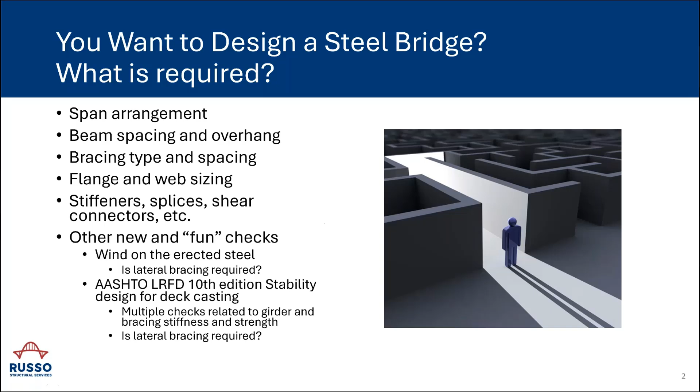So we're going to talk about some of the AASHTO LRFD 10th edition stability checks that are new and needed for deck casting. So what is bridge design?

Well, bridge design is kind of a unique combination of shalls and musts. Those are the things we find in the specification - in the case of a highway bridge, that's AASHTO. Some of the things you should do, maybe you'll find in the commentary of the specification. How about some things that would be good if you did them? A good source of standard industry guidance on best practices would be some of the National Steel Bridge Alliance, or NSBA's, collaboration documents. How about 'I wish you would' - some other guidance, maybe your local fabricators or erectors have preferences. And then there's 'don't you dare' - the things we have to avoid at all costs.

I like to tell designers there are many good designs. We ought not argue about whose design is better - maybe the thing we ought to do is avoid the bad ones. So that's what a bit of this presentation is about.

I want to begin at the end, and that is to sort of tell you where we're headed or why we're making this presentation. It's to highlight for you some of what can be found in AISC's NSBA standard plans for steel bridges, which you'll find at the homepage or landing page of NSBA's website, highlighted for you at the bottom right of the slide there.

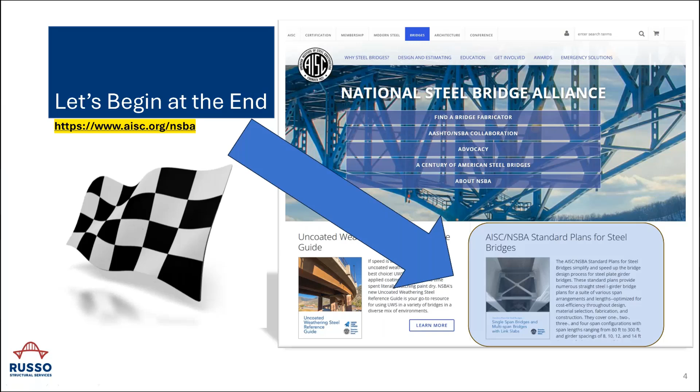The standard plans for steel bridges are a series of PDFs of almost 300 pre-engineered bridges that you can use to help with your design. There's nearly 300 — exactly 296 if you want to count them. The spans range from 80 to 300 feet, with beam spacings of 8, 10, 12, and 14 feet. Inside the 4 PDFs — one each for single span, 2-span, 3-span, and 4-span continuous bridges — you'll find the girders, stiffeners, shear studs, splices, tables of reactions and camber, pre-engineered diaphragms and cross frames, deck pouring sequences, and more.

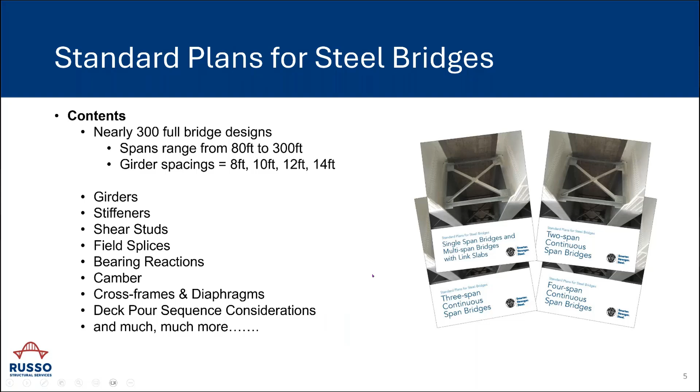So let's begin by talking about the fundamentals of bridge layout and planning in general, as it sets the stage for the various choices made in the development of the standards.

If we think about continuous spans, we tend to favor what is known as a balanced span. For multi-span bridges, continuous spans are generally preferred because they're more structurally efficient. Once you make a span structurally continuous, the ratio of the spans has a lot to do with the forces that develop in the individual spans. A balanced span arrangement, if we can achieve it, is preferred — one in which the end span is somewhere in the range of 75 to 82% of the length of the center span.

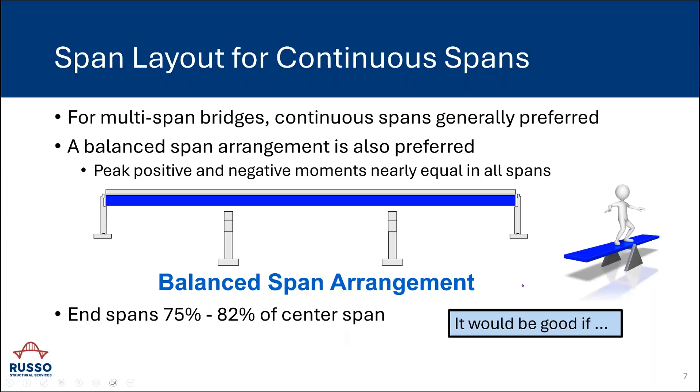It would be good, right, if there are no constraints on what your span lengths could be, to have a balanced span arrangement. What is this?

And the negative bending moments over all 3 piers are also virtually equal. So what does that mean for us? It means instead of a 4-span bridge with many different field segments that each have to be individually designed, I have a 4-span bridge where, in reality, I just have 2 things to design: one positive moment section repeated in 4 different spans, and one negative moment region repeated over 3 of the piers. So we've optimized, to the extent we can, the longitudinal layout of the bridge.

And now how about the transverse cross section? We have to support a certain number of lanes and shoulders and whatever the roadway engineers dictate the highway cross section to be, but we still have latitude and flexibility in choosing the beam spacing. Picking the beam spacing is a balance between establishing an overhang and establishing a standard beam spacing.

In the literature, and in some NSBA guidance and guidance from the Federal Highway Administration, you'll see it cited that an overhang that's about 28 to 35% of the beam spacing results in the forces in the exterior girders — which also carry the barrier rail and have different live load distribution characteristics — being about the same as the forces in the interior girders.

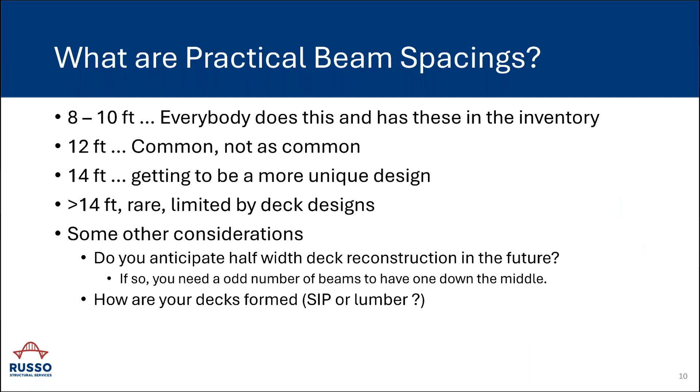Others are still using strippable, removable lumber forms. Each one of those has a practical limit to the maximum beam spacing.

How deep should a girder be? AASHTO provides some suggestions, not a hard requirement, but those suggestions echo traditional historic practice, and that is L over 30 as the minimum suggested depth of the plate girder alone for a simple span, and we can go a little shallower, 80% of L over 30, for continuous spans, because we get the benefit of structural continuity.

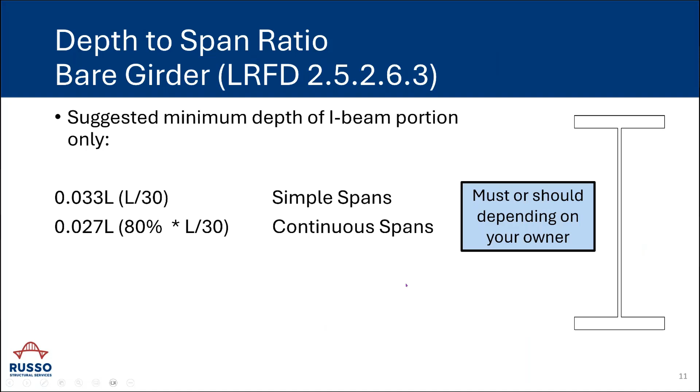And then how about the girder and the deck combined? Starting with simple spans, you generally don't want to be shallower than L over 25. You also don't need to go much deeper than that to get an economical section. For continuous spans, again, we can be a little shallower, 80% of L over 25, as shown in the specifications.

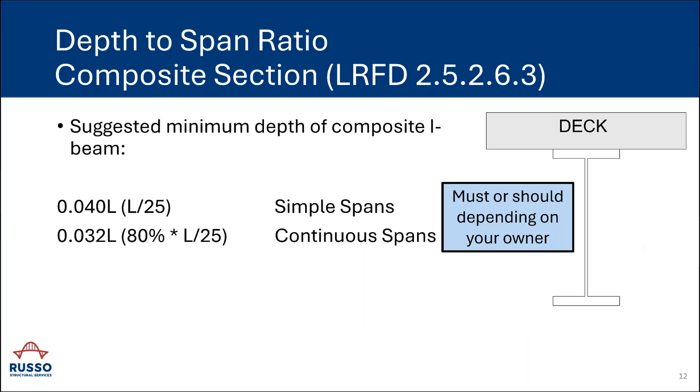The width of the flange should never be less than 1/85th of the length of the field section. Why? It becomes incredibly hard to pick that girder up with a crane or put it on a truck and ship it if you have very narrow flanges relative to the length of the section. So that would be one of those things that it would be good to do, but it's not an absolute requirement in the specifications.

For straight bridges, there are really no as-designed forces in those cross frames. We design our girders with some presumptive load distribution factor that assigns load to the girder, but never really considers the overall behavior of the system.

So what governs the size of this bracing? If there are no computed loads, the answer is you're soon going to find out. But what role does that bracing have?

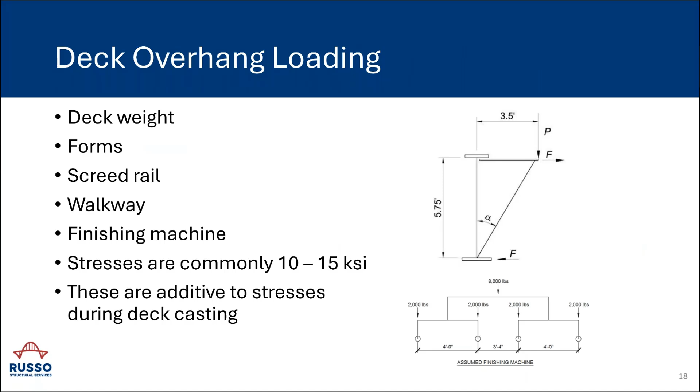And they are then additive to the stresses from the girder self-weight and the concrete that come from the deck casting process. All of this was considered for you in the development of the standards.

So where are we? We have a good design in the sense that we've laid out some reasonable spans, we picked some reasonable beam spacings, we have a girder that maybe is about the right depth, and all of this can be done with a line girder, and we can make sure that all of this satisfies AASHTO.

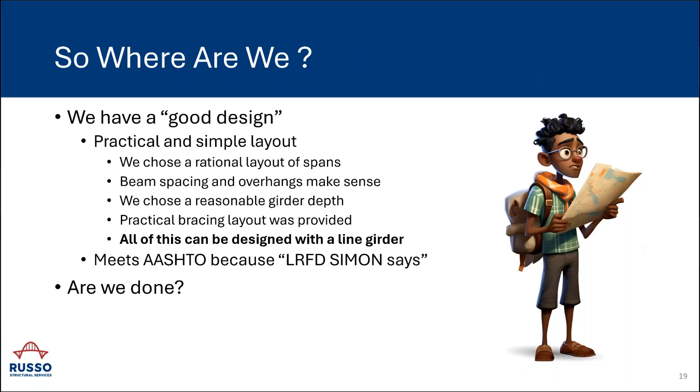Using for instance NSBA's LRFD Simon program, which can design a line girder for you in just a few minutes. But are we done? Is that all the specification asks of us? That we pick a couple of variables, type something into the program, and magically we're finished? I'm here to tell you, maybe unfortunately or fortunately, you're here today to hear it: no, we're not done yet. There are some other things to think about, like...

Wind loads and stability of the bridge during construction, and these new stability bracing requirements that I alluded to earlier, that have come into the specifications with the 10th edition.

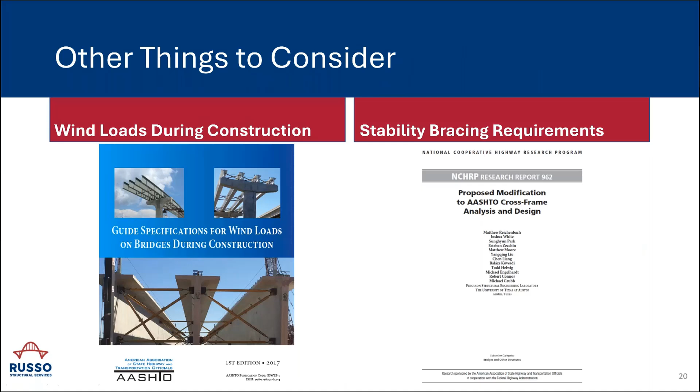The wind loads during construction come to us from a guide specification that AASHTO published in 2017. But if you dig into that specification, what you find is that these are really just strength design loads. What happens to the bridge in a hurricane? It doesn't really say much about how the bridge behaves under ambient winds, and whether the bridge is fundamentally too flexible to even be built. Can we put people out there and walk around on the steel if the bridge is moving around 2 feet in a light breeze? The specifications don't really address that.

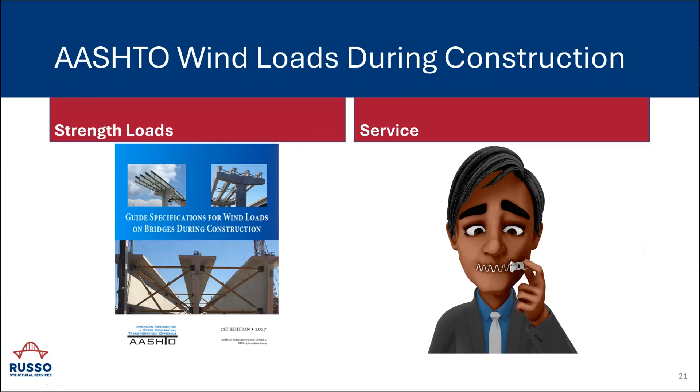What do the specifications do? Again, they mimic a strength design approach that we see for completed bridges in the LRFD specifications, and instead provide a series of coefficients and loads that are applied to girders, let's call it in the open framing condition. This process of wind load on the open framing was considered in the development of the standards, and there is some detailed notes and design criteria that were used for the design of those bridges.

So what is an engineer supposed to do about the service load behavior? Well, the answer is it really depends on where you work. The state that I live in, Pennsylvania, my home state Department of Transportation PennDOT has had some criteria, that to the best of my recollection has probably been around 20 years, that talks about loads that are to be looked at during construction of the steel bridge, making sure that the steel is not fundamentally too flexible in the lateral direction. And if it is, how do you stiffen it up?

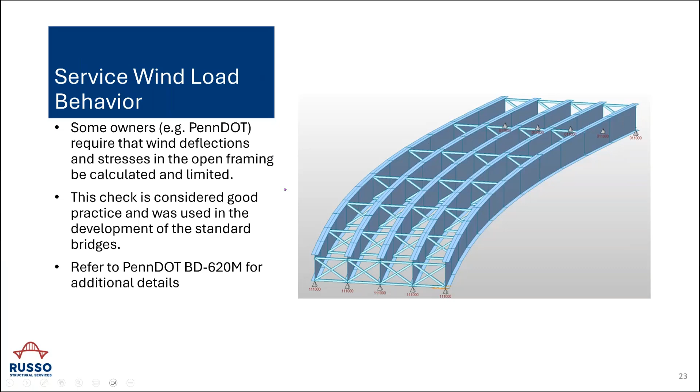Either by making the girder stiffer or by adding lateral bracing. PennDOT has a standard called Bridge Design Standard 620M that you might look at if you're interested in some of that criteria. What do these wind loads do, whether they're service loads or strength level loads?

Well, in the case of a single span, they bend a whole bunch of girders sideways. And we know what the moment is. The moment is easy, right? It's WL squared over 8.

But even predicting the deflection gets a little bit challenging because we tend to not have a uniform moment of inertia down the length of our span, even in the lateral direction. We have smaller plates near the end of a span and bigger plates near the center of the span. So even predicting deflection is not so easy for a simple span.

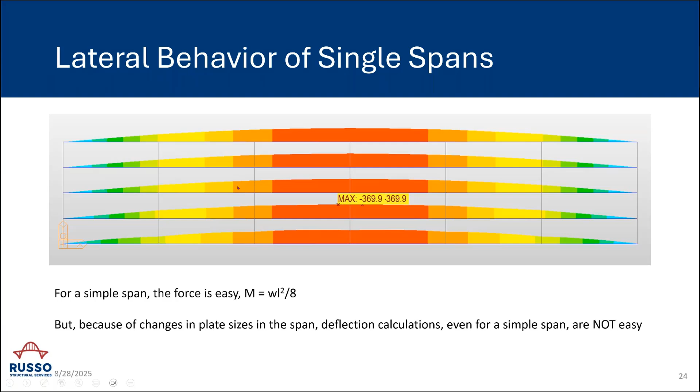For a continuous span, this becomes a mess. There's not really any rational way to figure out what the moments or the deflections are, because it depends on so many factors: the stiffness of the beams, the relative span length, the loads that are applied.

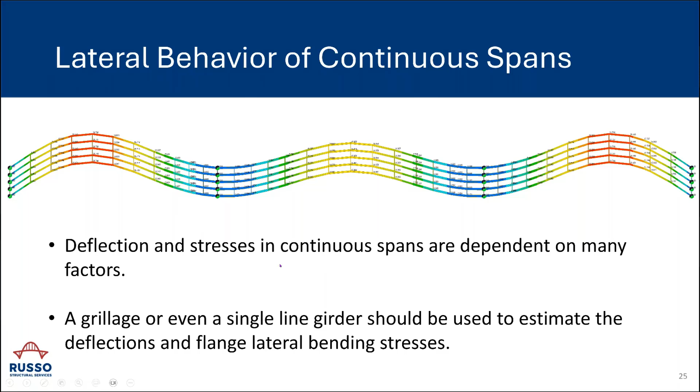But the good news is something like a grillage that you see here on the screen, or even just a line girder—make one line girder, get the total result, and sort of divide it evenly by the number of girders in the cross section—can be used to estimate those deflections and stresses.

And it's just a reminder, why do we care about these wind stresses? Well, during construction of the bridge, these wind stresses also become additive to, say, the self-weight of the structure, again as some sort of a strength or a service limit state check of the capacity of our flanges. It's not a hard thing to do, to go ahead and build a simple model and put some load on it.

PennDOT has a criteria, which we adopted in developing the standards, that says the maximum permissible deflection would be L over 150. So we're close, right? We're just a little bit over. Could we have closed our eyes to a half an inch? Probably. But the point I bring this up is to emphasize how you get out of this problem.

One way out of the problem is to reproportion your flange. Take whatever the flange was, so wide and so thick, and make it thinner and wider. When you do that, you increase the lateral moment of inertia, which is a cubic function of the flange width, and maybe that solves the problem.

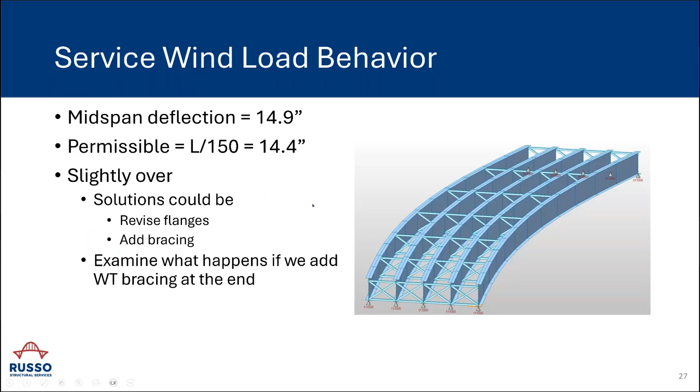So this is the same exact bridge with lateral bracing added at the end of the span. If you stare at the image, at the bay closest to us and furthest away, I have top flange lateral bracing shown in that model. The midspan deflections are now just a little over an inch, where they were previously about 15 inches.

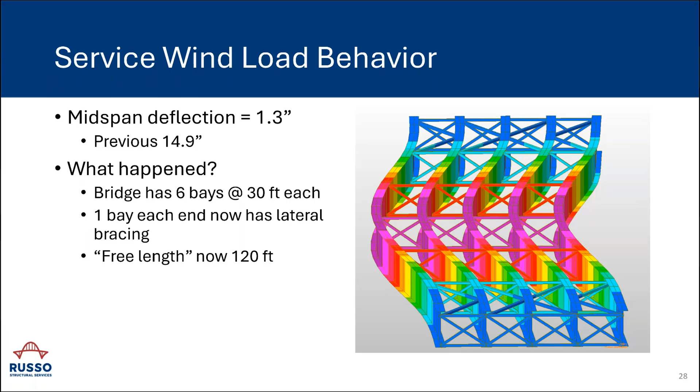Well, obviously we stiffened the end of the bridge. It went from kind of a pinned condition to almost a fixed condition, and the unbraced length went from 180 feet down to 120. So all of that tells you that lateral bracing very effectively reduces the deflections, but it's also going to pick up some load.

This is an acknowledgement of a really handy design aid. So this lateral bracing now has some loads in it. How do I design this eccentrically loaded lateral bracing? I point you to a publication with really handy design charts from AISC's Engineering Journal from 2010 that talks about the strength of eccentrically loaded WTs.

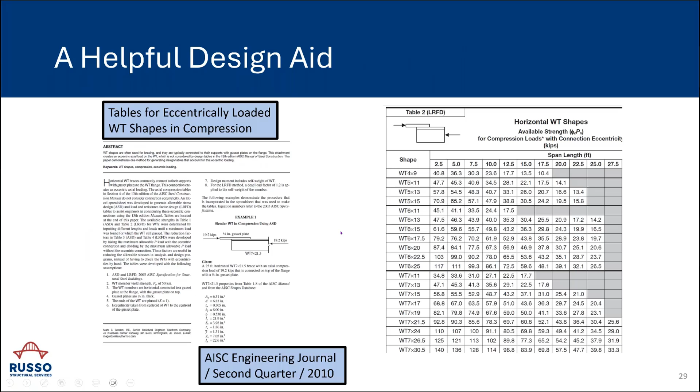All you do is go into one of these charts and say, what's my unbraced length and what WT am I thinking about using? That table on the right-hand side of the screen tells you how many kips the member can carry. So there's not much you have to do other than go look something up in a table.

Now, I had mentioned the stability design requirements, so let's spend a few minutes talking about that. What does bracing need to do? Every steel bridge we drive under, if we look up, we see something called a diaphragm or a cross frame. Why did someone put that in?

I said earlier that we put it in to reduce the unbraced length and control something called lateral torsional buckling. But it would also seem obvious that we can't just put anything in there. We couldn't go get some drinking straws and put them in, and because it looked like an X or a K, consider it to be a brace. Obviously that brace has to have some minimum strength and minimum stiffness in order to do its job.

I'm going to introduce you to the new provisions in the LRFD specification's 10th edition and briefly talk about what they do. The fundamental concept with a diaphragm or cross frame is to prevent twist of the girder. Now, I've already said lateral torsional buckling a couple of times, and if we slow it down further, that means the girder deflects laterally and twists in the process of buckling. If I can prevent either one of those things from happening, I can prevent lateral torsional buckling from being a governing design constraint.

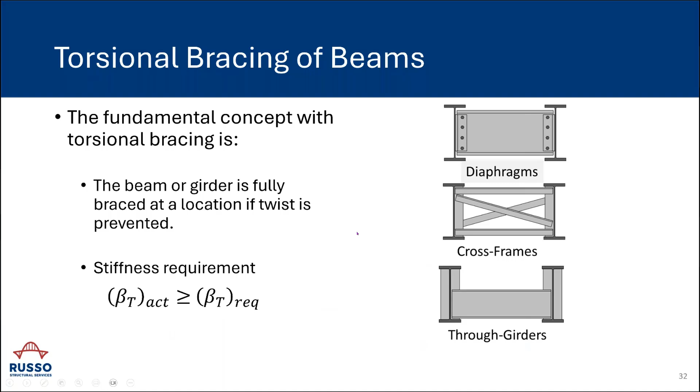The role of a diaphragm or cross frame is not to prevent lateral movement, because we could push these girders sideways and the diaphragm or cross frame doesn't stop that. The diaphragm or cross frame stops the girder from twisting about its longitudinal axis. It prevents torsion. That means we can write an equation that says the torsional stiffness provided to the girder, the thing that stops it from twisting, has to be greater than or equal to some required amount of stiffness that the cross frame needs to have.

You're going to find in a brand new article in the specification, 6.7.4.2.2, these two following governing equations. They look a little bit messy, but on the left-hand side is stiffness, on the right-hand side is strength. What does the stiffness equation require us to do? Let's take a look.

In the numerators, the span length and the factored deck casting moment. These are the moments that occur in the girder during the process of casting the deck. Given that we generally cast decks sequentially, particularly for longer span bridges, you've got to figure out the governing moments in the individual spans and use that as Mu. In the denominator, we have E, the lateral moment of inertia of the girder, Iy effective, and I have a little sketch at the bottom of the screen. It's the lateral stiffness of that girder, and it's just how many braces we have in the span. Then Cb is a moment gradient modifier.

So that's how stiff a cross frame needs to be. It has to be that stiff to stop the girder from twisting.

If we acknowledge that no girder is ever erected absolutely plumb, that there is some potential sweep or twist in the girder, then that becomes a seed deformation that also leads to a moment that will develop in the cross frame. So the equation on the right is everything in blue moved over. We're just going to bring the stiffness term over, and we're going to write that moment equals stiffness times displacement.

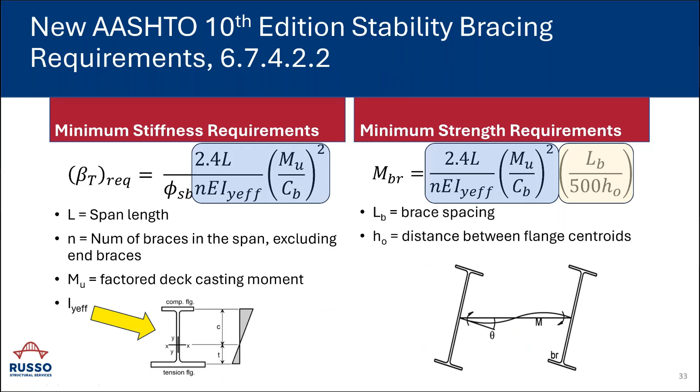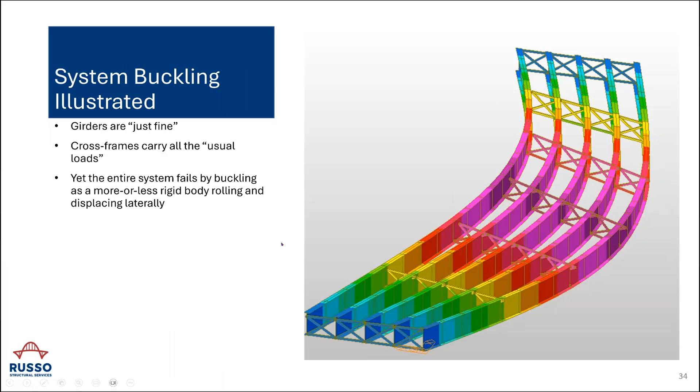Now let's talk about what is the stiffness that's provided. What stiffness is provided to the girder or inherent in the system? Well, we have this equation in the specifications. It says the actual stiffness, and remember, the actual stiffness has to be greater than something that's required, is 1 over 3 fractions in the denominator.

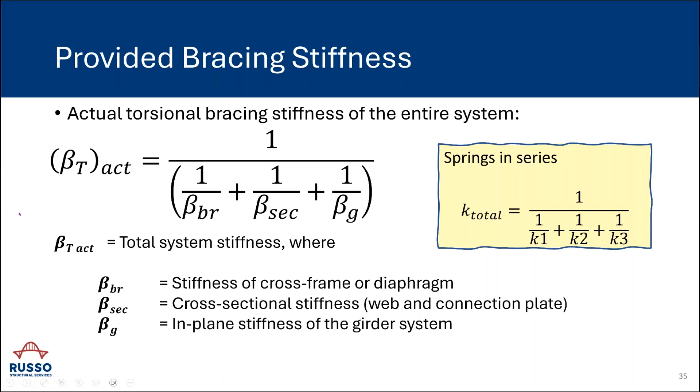There's the stiffness provided by the cross frame or brace, that's beta BR. There's something called cross-sectional stiffness, beta sectional, and something called the in-plane girder stiffness, beta G. And if we go back to high school physics class, we'll realize this is just a springs-in-series problem, right? Three springs strung together end to end. The total stiffness of that system is softer than even the softest spring because the springs are all leaning on each other for resistance. So let's start out with the cross frame.

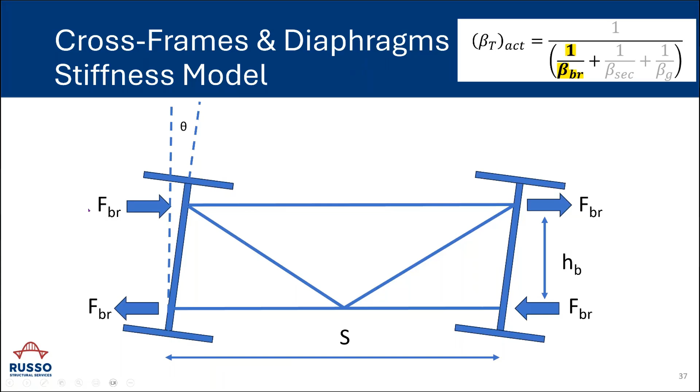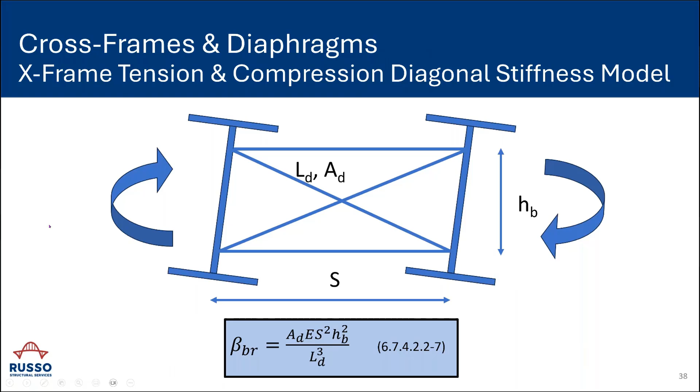The LRFD specifications are just going to give you the equation. So if you have an X frame, you simply plug in the areas of the diagonals and the chords and the height of the cross frame and the girder spacing into this equation, and it gives you the rotational stiffness of the frame itself. If you have a K frame, plug everything into this equation.

If you have a solid diaphragm, then we're kind of back to moment distribution, fixed end moment, side sway kind of problem. What is the flexural stiffness of a beam bent in double curvature? It's just 6EI over S. But these equations are given to you in the LRFD specification in these new stability articles.

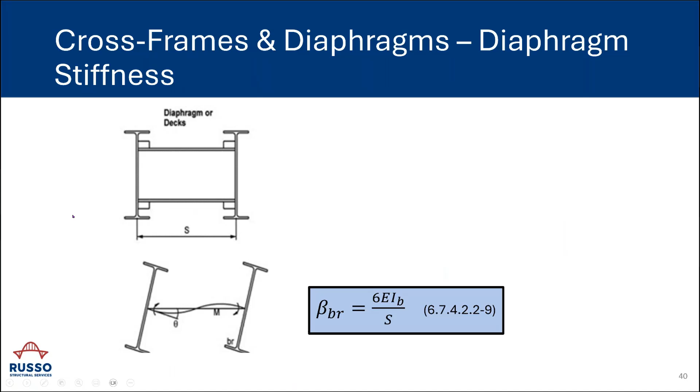There are equations given to compute it, but I want to remind you that for the most common thing we do, which is to design I girders, specifications already require that a brace be 75% of the depth of the web. So if we have to be 75%, and at 80% we don't have to think about this cross-sectional distortion business at all. I'm going to tell you just go to 80% or taller and be done with it. And that's exactly what's done in the standard plans.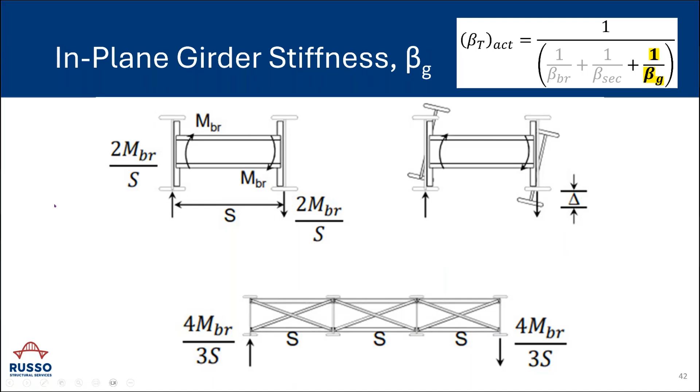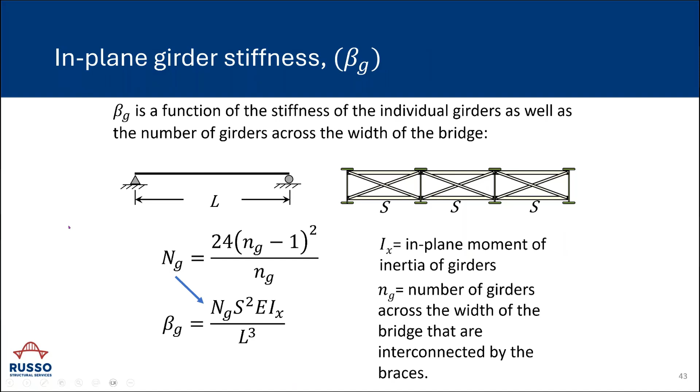When the specification gives you this equation for in-plane girder stiffness, this is the behavior they are talking about - the fact that there's an interaction between the bracing and the main girders that causes some roll and some deformation. This is the equation you're going to find in the specifications. You compute this term capital NG, which is just a parameter about the number of girders in the system, and that gets fed into this term beta G, which then includes the girder spacing. Now the strong axis moment of inertia, because if you think about deflection and roll of that system, that has to do with Ix of the girder. And of course the amount of deflection you're going to get has something to do with span length, and it's a span length cubed term in the denominator.

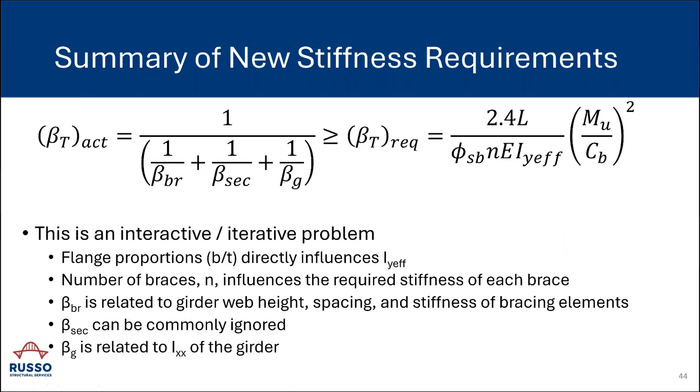So in summary, the specifications tell us that the actual stiffness we provide - this springs in series stiffness of beta G of the girders, the cross-section distortion, and the inherent stiffness of the cross frame - has to be greater than some required stiffness so that system buckling can be prevented. In other words, lateral torsional buckling, this buckling between the cross frames, becomes the only thing we have to think about once we provide minimum stiffness in our braced system. And a reminder again that the bracing has to have a certain amount of strength.

Summary: AASHTO now has requirements in the 10th edition requiring that flexural members be braced. The purpose of that stiffness is to control the twist in the girders. The restraint of that twist results in a force in the girder, so we have to do some strength design.

But I'm here to give you some good news. In developing the standard plans, there were about 200 unique designs of straight plate girder bridges with skews from 0 up to 20 degrees. Typical cross frames designed just for KL over R to start with meet or come close to meeting the stiffness and strength requirements for every bridge I designed. In no bridge did I have to come up with unusual cross frame spacing or member sizes to get the cross frames to work.

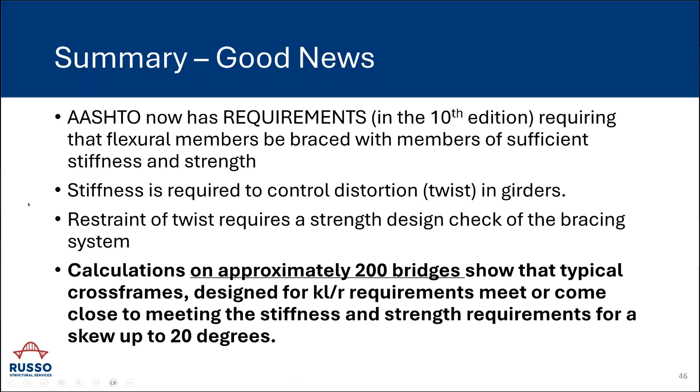What if this doesn't work? Of course, some of my initial designs didn't work, and I had to change some things. The easy solution is to change your Iy effective—take your flanges, thin them out, and make them wider.

You can deepen the girder to increase Ix, or add a line or two of bracing, which increases little n in the denominator of the stability equations. But if it's way off, you're probably in the business of needing to add top flange lateral bracing for one or two bays at the end of the span—specifically the discontinuous ends.

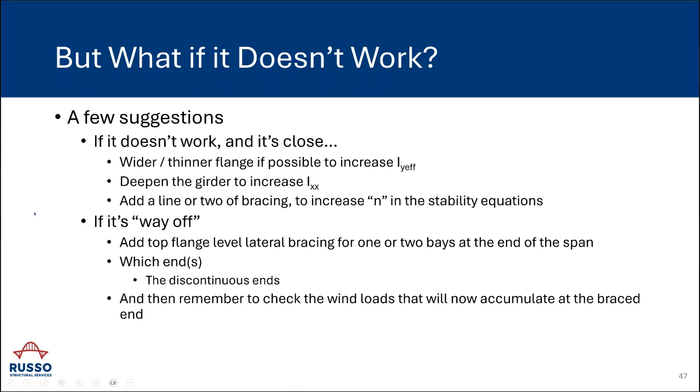Once you put this lateral bracing in, don't forget it's going to grab all the wind load in the span, and that's where it's going to go. So you'll have to design some additional things for that.

Now let's talk about a tool you can use that has everything I've talked about, plus probably 50 more things I didn't mention. We're going to quickly go over the standard plans for steel bridges I mentioned earlier, available on AISC's website. I was the lead designer.

Russo Structural Services had this contract with AISC. Genesis Structures assisted with constructability advice and did the yeoman's work on a lot of the CAD work. My friend Mike Grubb and I worked together extensively implementing all of AASHTO's new requirements, and then Mike went back and did quality control and AASHTO code compliance on the work.

What will you find on AISC's website? Four PDFs. The single spans have designs for 8, 10, 12, and 14 feet on center, with pre-engineered spans from 80 out to 300 feet in 10-foot increments. It's not just the girders—it's everything else you see on the slide: diaphragms, cross frames, lateral bracing if needed, fully designed field splices, deck details, link slabs. In total, all of this is just 39 sheets of a PDF.

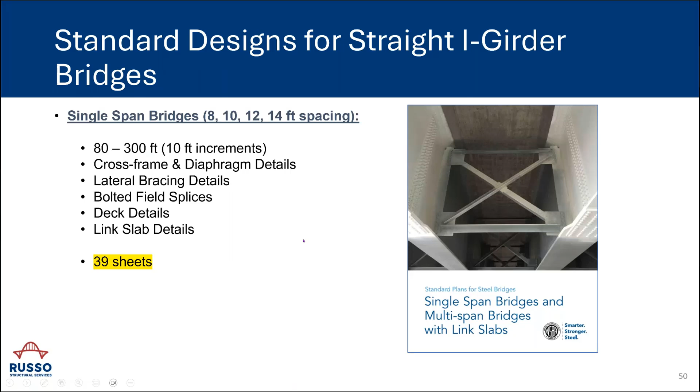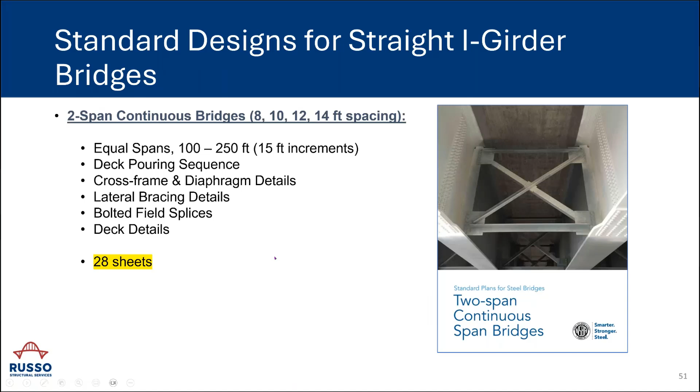For a 2-span bridge, we repeat the beam spacing. The span lengths chosen were 100 to 250 in 15-foot increments, again with all the supporting information. 3-span and 4-span bridges happen to use the same span lengths.

These are dictated by center spans ranging from 150 to 300, again in 15-foot increments. The end spans were 78% of the center span, which is right in the sweet spot of a balanced span arrangement—all the supporting information in 33 sheets. For 4-span bridges, all the same information comes to 33 sheets as well.

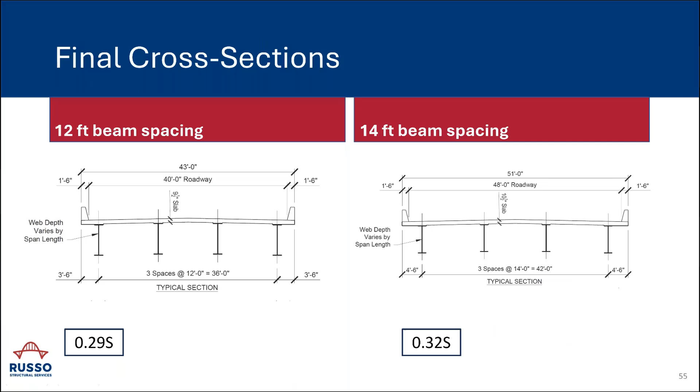When you open the plans, you're going to see 8, 10, 12, and 14-foot cross sections. These are just sketches of the cross sections. I put a box at the bottom of the page showing the ratio of overhang to beam spacing, to show these are in keeping with the recommendation I gave earlier, which was like 1/4 to 1/3, or 0.25 to 0.33 rigorously. So that was 8, 10, 12 foot, and here's 12 and 14 foot on center transverse cross sections.

This was not just a design problem. There was a couple months of fabricator outreach at the beginning of the project where we talked to them about standard plate widths, web thicknesses, flange thicknesses, optimal web depths, stiffened versus unstiffened web designs for shear, how to optimize top and bottom flanges, how many complete joint penetration welds in a given field section, how long of a piece they want to ship, how heavy of a piece they want to ship, and a whole bunch of other details about studs, splices, and cross frames.

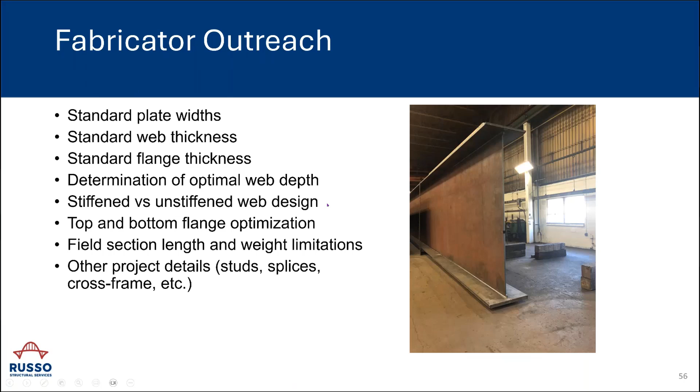So let's show you what's in the standards. I'll grab the 3 spans as an example of the standard playbook you see when you open the standard. Any particular piece of the standards begins with a drawing like this. You'll see a typical section and a girder elevation with a whole bunch of variables all over it. All the plates are given some letter of the alphabet name because you can look them up in a table.

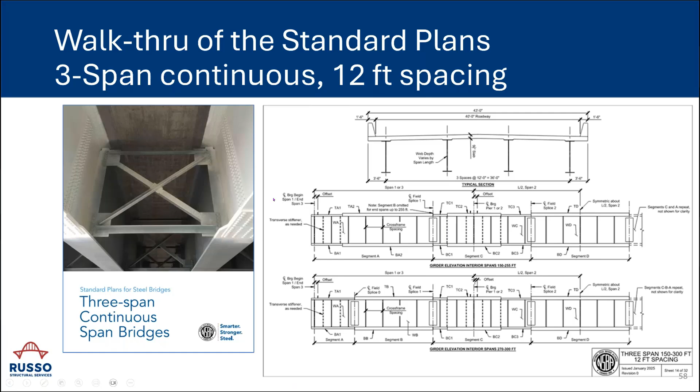As a reminder, what's in the 3-span continuous standards: 8, 10, 12, and 14 feet on center, spans from 150 out to 300. You find a page of general notes. What do you find in the general notes? Well, lots of things—for instance, what loads were assumed in the development of the standard.

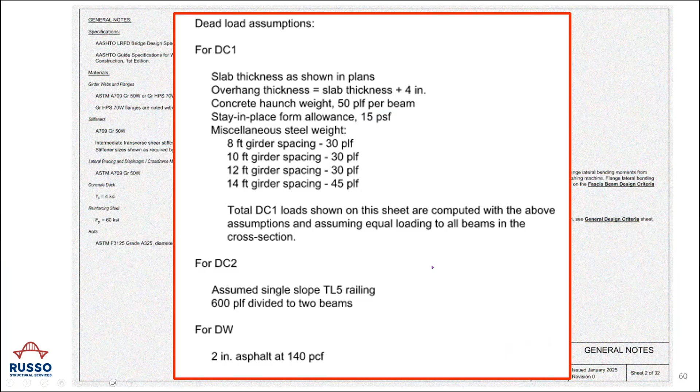Here's the non-composite dead loads, what was assumed for the weight of the forms and miscellaneous steel, what we assumed for the weight of railings, and what we assumed for the weight of a future wearing surface. Design assumptions: for girder design we did all of these things—we used LRFD Simon, designed for 20 degrees skew, designed for infinite life—so many, many notes about all the assumptions in the development of the standards.

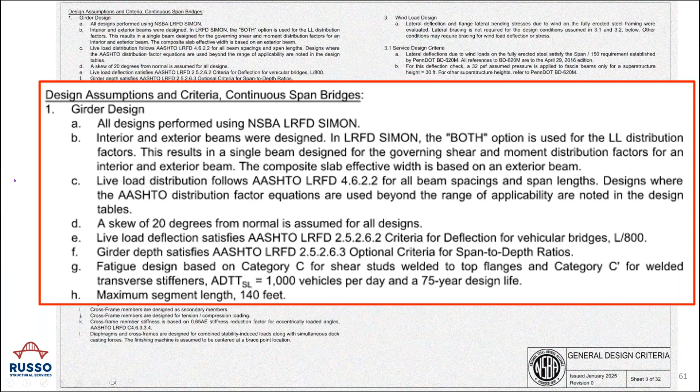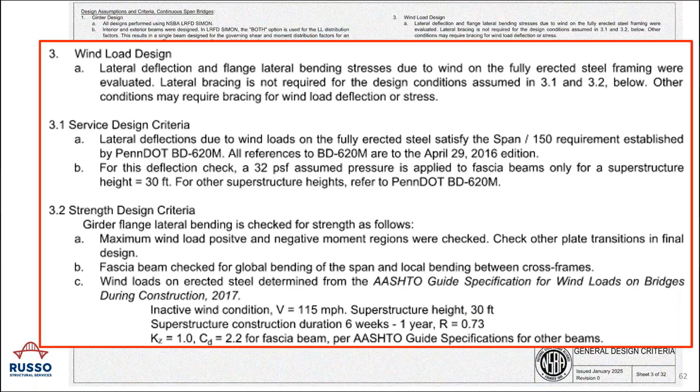There's a whole bunch of notes about wind load, because that was a unique element of this project—we designed for wind not just in the completed bridge, but in the erection condition, and these are all the things we assumed. There's a whole table of flange lateral bending information, what we assumed for the weights of finishing machines, and our controls on deflection and rotation of the girders during construction.

So a bunch of notes, and then a bunch of charts you can use that say if this is your web depth and this is your cross frame spacing, this is an estimate of flange lateral bending moment. Even outside the standards, it's a nice way to help with fascia girder design. Deck pouring sequences are given for all the continuous bridges—what did we pour first, second, third, fourth, and fifth, and why? All these decks were also assumed to be poured end to end continuously, and the design envelopes the deck casting moments of either scenario.

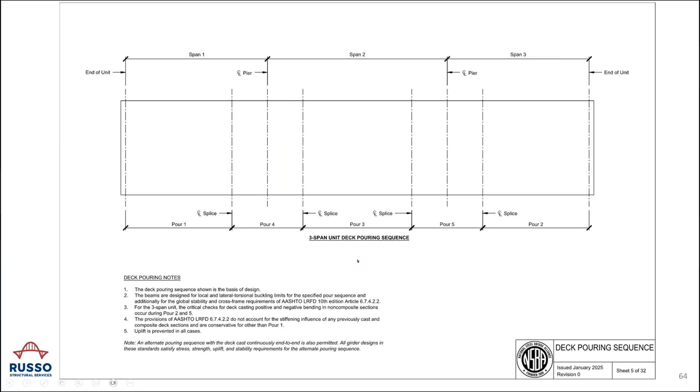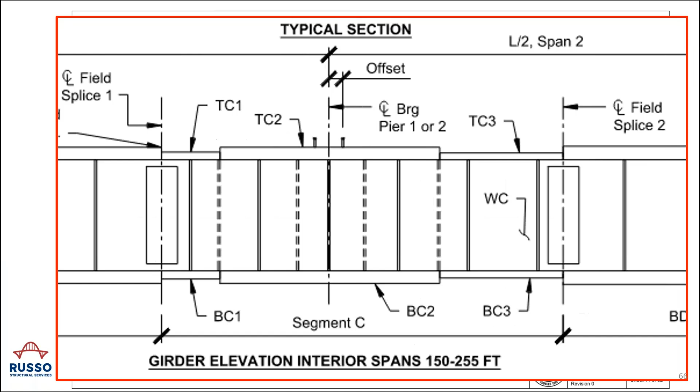If we zoom in on one of the pier sections, you'll see, as I mentioned earlier, there aren't any dimensions given—it's all a bit cartoonish, with just a bunch of labels. T is the top flange, B is the bottom flange, and the segments all have a name: A, B, C, D. What does that do? Well, it takes you to a table.

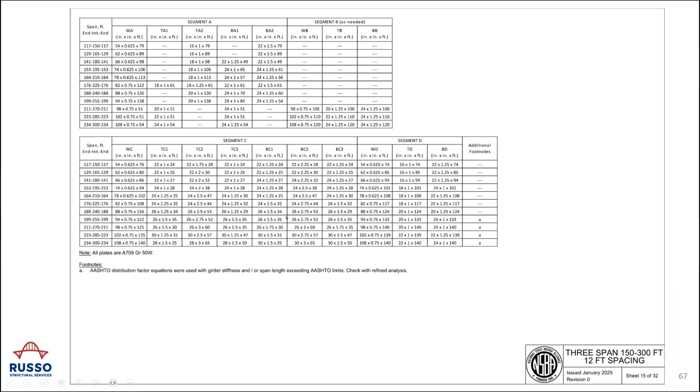So if you flip the page from the drawing we just saw, you'll find a table that looks like this. We'll zoom in to a piece of this table, and you'll find a span configuration, and then all the various plates.

You know, for the webs, what's the height, what's the thickness, how long is the piece? For the flanges, what are the width, what are the thicknesses, what are the lengths of the pieces, for the various segments down the length of the bridge.

A lot of times you're just going to see some tick marks, and that just means that the plate doesn't even exist in a particular design. It wasn't needed. For instance, the flanges many times you'll see are just prismatic from end to end because the spans were such that introducing CJPs in the field section wouldn't make sense.

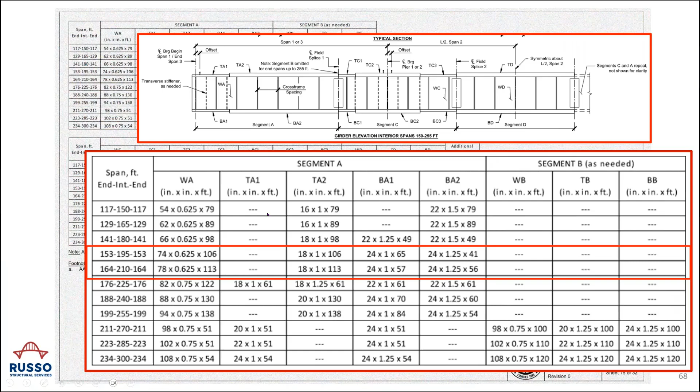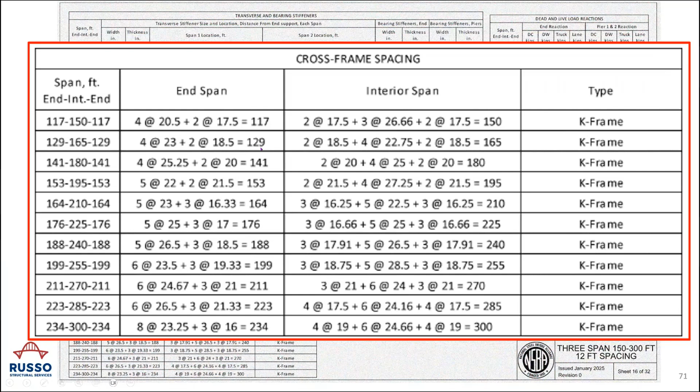Here are all the reactions, dead loads and live loads, both at the end, the discontinuous end, as well as at the interior continuous piers. And what are all the girder weights?

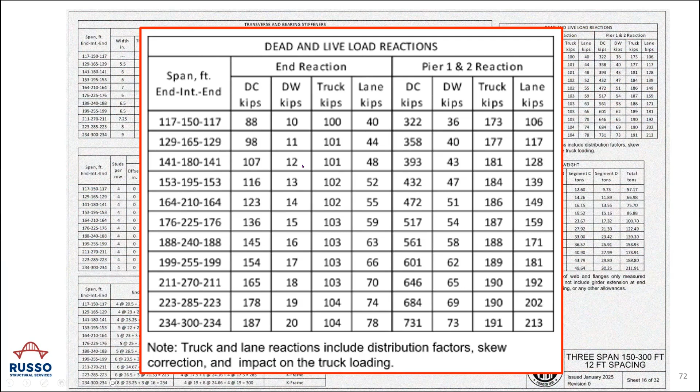I was talking to Vin a little bit before the presentation, and I wanted to remind him and remind you, in our interaction with the fabricators, one of the conclusions that we came to is we wouldn't have any field sections longer than 140 feet, and we wouldn't have any field segments heavier than 50 tons.

And in the standard plans, you will occasionally see the use of high performance steel. That high performance steel was really in there only to make sure that we had field segments that were under the 50-ton limit. That's really what drove it. It's not that we couldn't have put in a really thick grade 50 flange, it's just that the segments got too heavy. There are tables of deflection and therefore camber information.

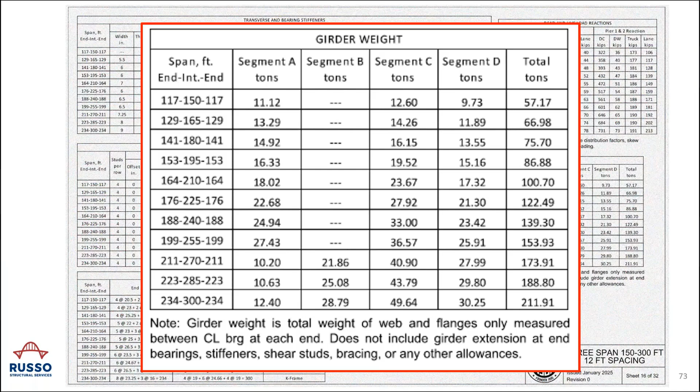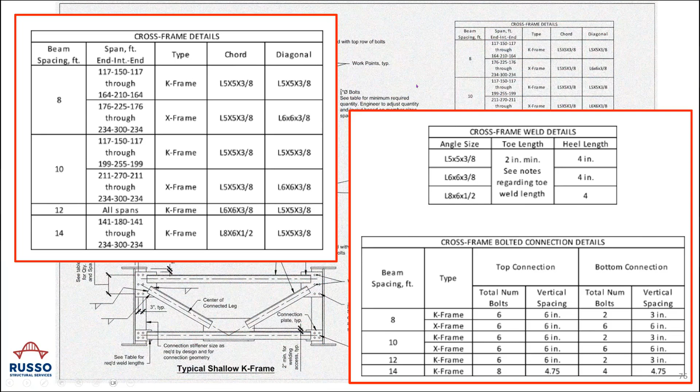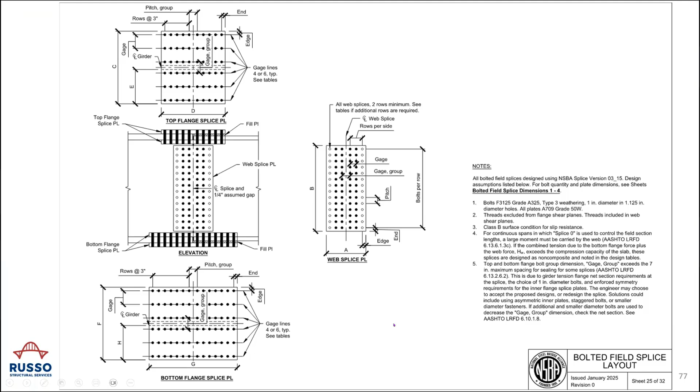Again, sort of a cartoon or a picture of a bolted field splice with the top and bottom flanges shown at the top and bottom, the web in the middle. Again, a bunch of variables, some notes describing the various things that we assumed. And all those variables are key to a drawing, which has all the various plate sizes, the web plate sizes, the top and bottom plate sizes, fill plates if they're needed, and then how many bolts are in every connection are fully described in this table.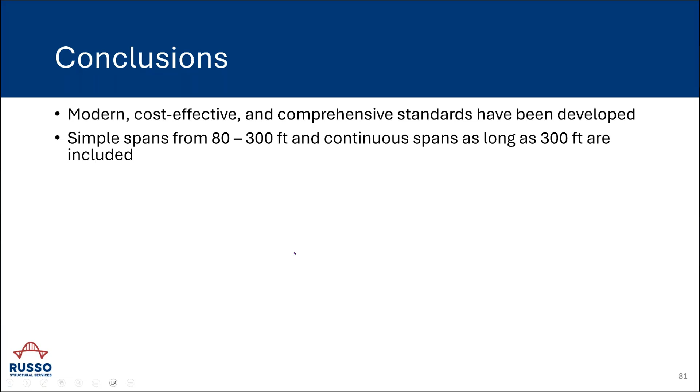So in conclusion, we have modern, cost-effective, and comprehensive standards that cover spans from 80 to 300 feet for simple spans as well as continuous spans. There are 4 unique beam spacings of 8, 10, 12, and 14 feet.

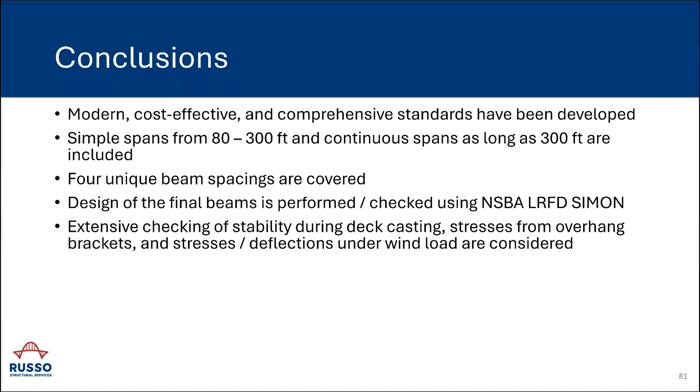Design of all of these beams was performed using LRFD Simon. There was extensive checking of stability during deck casting, stresses from the brackets, stresses and deflections under wind load all considered, and then lots of other things like splices and diaphragms and lateral bracing and shear connectors. It's pretty much everything you need for the design, other than you haven't stamped and sealed it and put it on a CAD sheet that's acceptable to your particular owner.

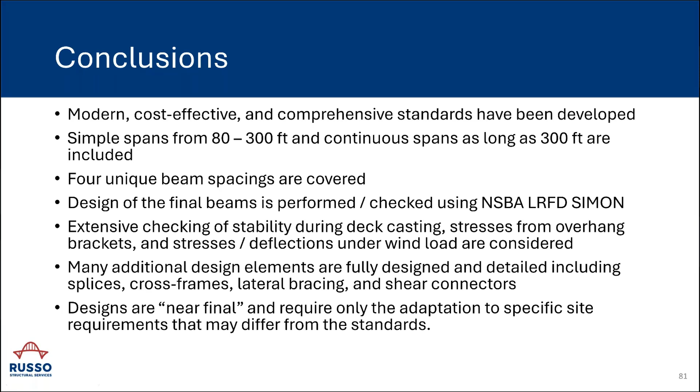I say the designs are near final. They only require adaptation to specific site requirements that may differ from the standards. That's it. Thank you, Frank, for your presentation.

My name is Vin Bartuka. I am the Steel Bridge Specialist with the National Steel Bridge Alliance. Today, I'll cover how the AISC NSBA standard plans, which Frank just discussed, can help speed up decisions, improve and add value for both contractors and designers.

So we'll start with design build and early decision tools. We'll move into type size, location studies, and span to depth charts, some resources that Frank briefly touched on, some things that can be found or derived from the standards. Then we'll cover field splices and conclude with the value these resources can provide for contractors and designers. Again, these are all on our website, standard plans, and there's a QR code as well.

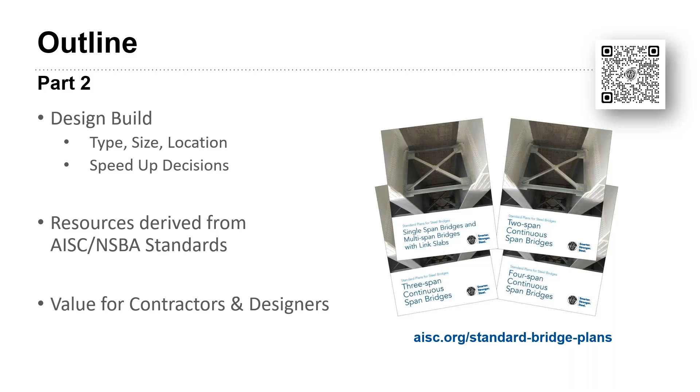So these tools give you a head start on deck sizing and bridge concepts. Time savings is something we really want to stress that can help when you use these standards early on. By having a framework early, teams can dedicate resources to other innovations instead of reinventing the basics of bridge design.

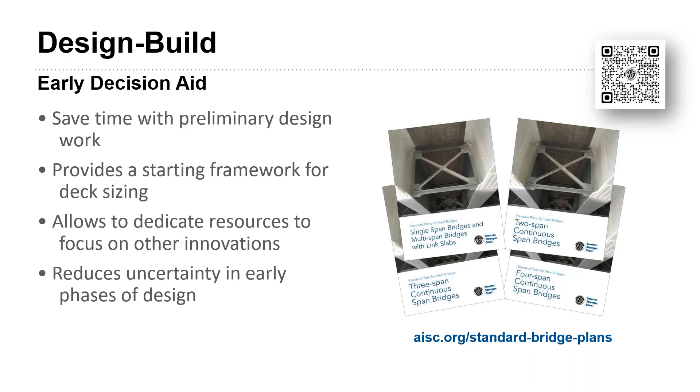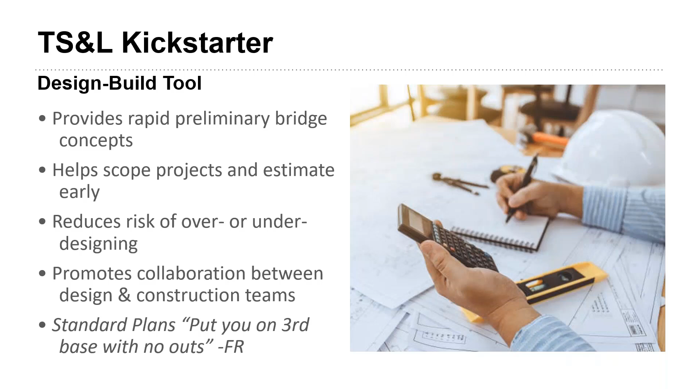So type, size, and location kickstarter — these standards really let you get into the scope of a project quickly. It reduces the risk of over and under designing, and it promotes collaboration. As Frank famously has said in the past, these standards put you on third base with no outs. So close out a win without having to start from scratch.

material shipping constraints, and erection feasibility. So some recommendations and considerations from my findings of these charts: for steel girders up to 300 feet, ratios around 20 to 30. Closer spacings allow for shallower girders. Longer spans may need deeper sections, and that's why Frank touched on the HPS 70W — and thank you for covering that caveat about no field sections greater than 140 feet in these standards, and no greater than 50 tons for lifting. That's a very good point Frank made. Variable depth girders are also an option for optimization and aesthetics.

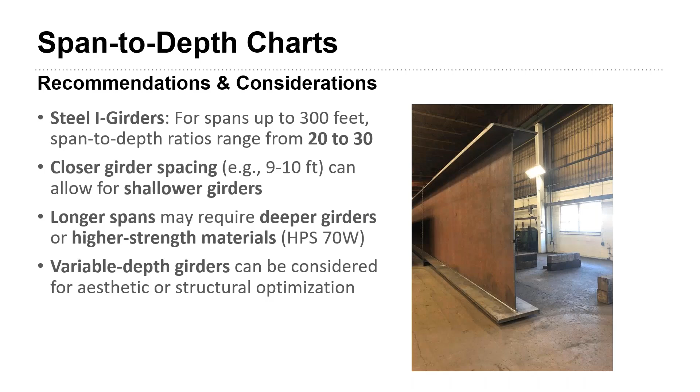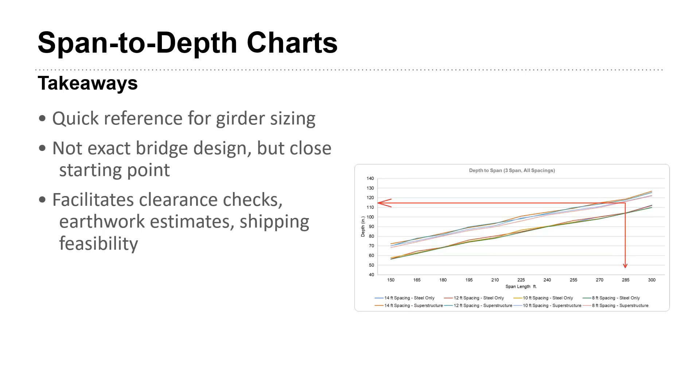Takeaways: this is a quick reference for girder sizing. It's not the exact bridge design, as Frank pointed out, but it's a very close starting point, and it facilitates those checks — vertical clearance, some earthwork estimates, and shipping feasibilities.

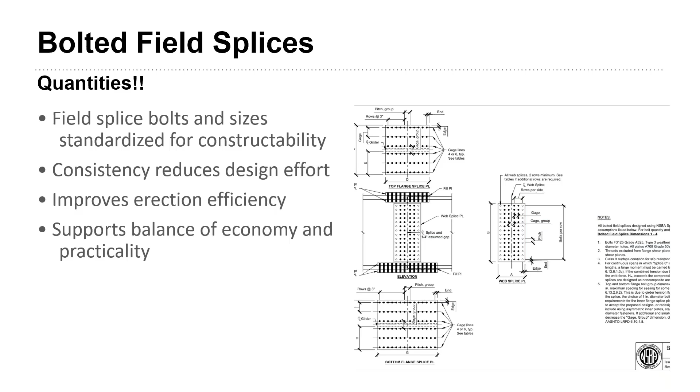Next was the bolted splices. So you're able to standardize bolt quantities and sizes, which will then simplify constructability. Consistency across your projects reduces design effort and makes erection a lot more efficient.

And lastly, some takeaways for contractors. Frank highlighted those girder weights, very useful for contractors for seeing improved fabrication, shipping, and erection efficiency. Designers can gain confidence in preliminary sizing because everything's there. Most importantly, both sides have a common reference point, which promotes collaboration. So these standards are starting points, but also a great way to collaborate.

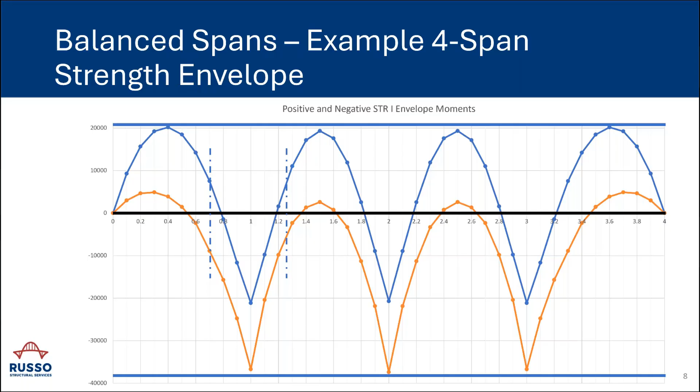Or how am I going to repaint it in 50 years when the paint has to be renewed? So things like back-to-back angles are strongly discouraged. And again, in the context of these standards, which are straight bridges with up to 20 degrees skew, there's no technical justification for any sort of goofy cross frame or anything with double angles. Everything in the standards uses relatively small angles, and they're all single-sided.

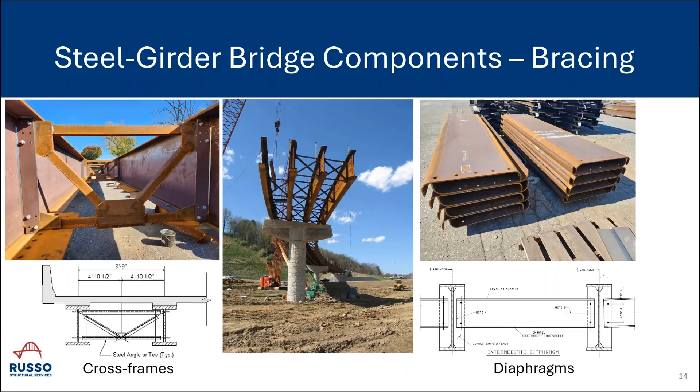Great, a couple more questions and then we'll wrap here by 2:20. The concrete industry moves pieces longer than 160 feet. Why does the steel industry limit to 140? The steel industry moves pieces as long as 160 feet or longer all the time as well. So the decision to cut things off at 140 was simply for establishing some dimensions so that a standard plan could be developed. It doesn't mean someone can't move a piece longer than 140 feet. Steel girders longer than 140 feet get fabricated and moved commonly, but they require some coordination as the design of the project is going on to make sure you can really get something there.

Did you have some more to add on that? Yeah, just to add, there may be extra permitting required, but I always recommend reaching out to your local fabricator to discuss piece lengths as well as delivery routes. It's just a great conversation starter. Speaking to your local fabricator can sort out any shipping constraints. But to add to that great point, we do ship commonly over 160 feet — these standards were just developed with the fabricator's input set at 140.

And I'll add a little bit to that too. Ben mentioned finding your local fabricators — NSBA is a fantastic resource for that. Go to the AISC or NSBA websites, contact your regional rep, and they can hook you up with local fabricators. Frank, did you have more to add there? I think all I was going to say is, as an experienced bridge designer, I've designed a lot of concrete bridges as well. I wouldn't want to make the assumption that I could get 180 feet of anything anywhere. As you push into these longer lengths, regardless of material, you simply have to do your due diligence during preliminary bridge planning to find out if it's possible. You just can't standardize around somebody thinking they can get 180 feet anywhere.